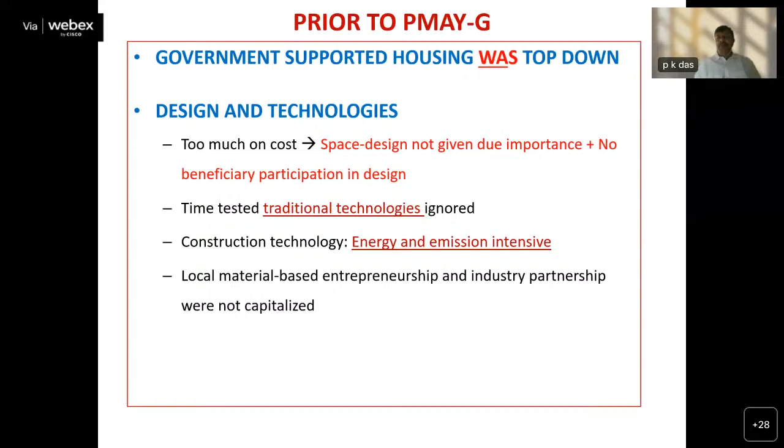Now, under these circumstances, the MORD expectation was to address the above issues and set a trend in rural housing in general through PMAYG. So PMAYG is not like one more housing program of delivering 30 million houses. Through this, PMAYG wanted to set a trend in rural housing and influence rural housing in general.

Now, what is the process that was adopted to have this paradigm shift? 13 states were chosen on priority basis by the Ministry of Rural Development. And what we did was, instead of starting the design at the studio level, we went to the beneficiaries. We went to the beneficiaries and we wanted to understand what their aspirations are.

So we didn't define what a housing is as per the Bureau of Indian Standard. We requested them, how do you think a complete house should be for you? So the beneficiaries defined it. And then we saw what was possible within the fund for PMAYG, and the gap was supposed to be mended. How do we mend the gap?

The study was based on resource mapping, and it was focused on consultation and participation. We took 9 basic criteria for the in-depth study of the housing sector. We began at the state level, then district, then block, settlement, and households level.

The entire journey was by car, slightly expensive, but wherever we stopped for a cup of tea, we'll stop there, go to the village, and have a look at what kind of materials are being used, talk to a few masons, about materials, etc. So this is how we enlarged our understanding about how the people in the rural areas live.

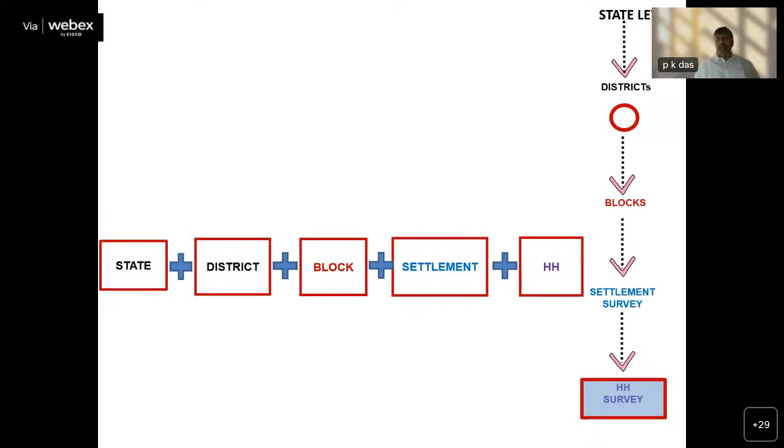Now, in this process, we got how the state, district, block, settlement, and particularly the housing households view housing as one of the solutions. These were all merged together and synthesized into a report. And the report was shared with the state government.

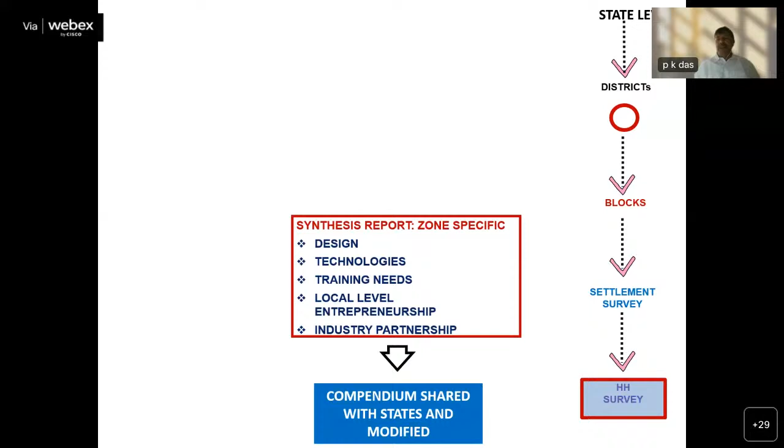And after getting their comments, it was finalized and it was fed into PAHAL, the book which Mr. Negi has informed right in the beginning. And Dr. Prashant Kumar, who is the other speaker, was the main captain of that particular movement.

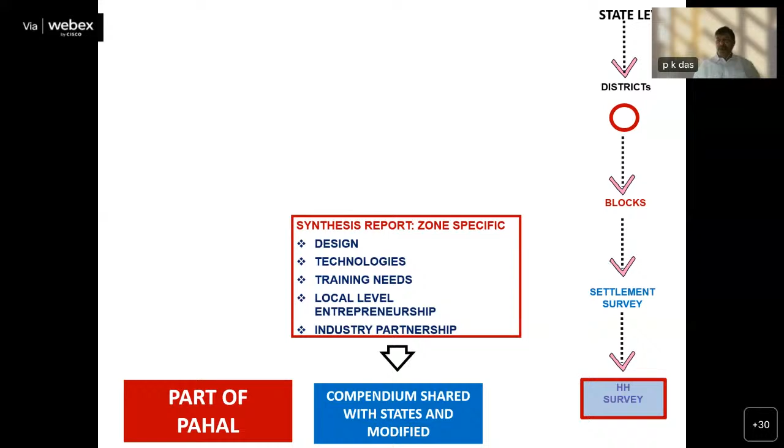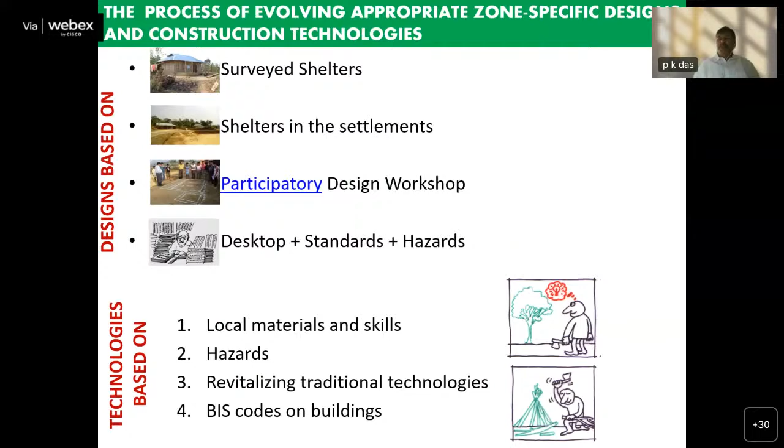Now, you can look at the process of the design and the technologies. You can look at the participatory process. And the technologies were primarily based on local material technologies.

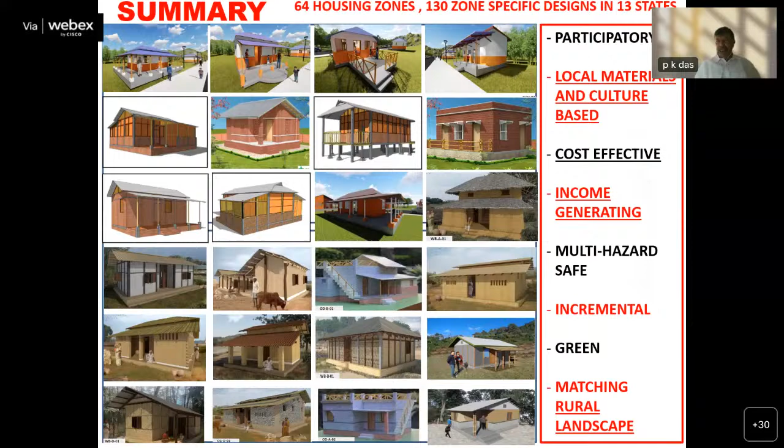When we conducted this in the 13 states of India, we got 64 housing zones of India and about 130 zone-specific designs. Now, that was a time when, it was the end of 2016, and it was told that the Honorable Prime Minister would be launching PMAYG in Agra.

But then we came to know from MORD that the Honorable Prime Minister cannot launch it if the technologies are not validated. Now, the 64 housing zones, 130 designs, and a good number of local material-based construction technologies were also evolved. Who could be the institute? So we were trying to expedite this with both MORD and the UNDP.

And one thing that came loud and clear was that CBRI is the pioneering institute where we can go for this. CBRI scrutinized 600 drawings and examined the architectural and structural side of that, and finally prepared the validation report of 40 technologies. And they look like this.

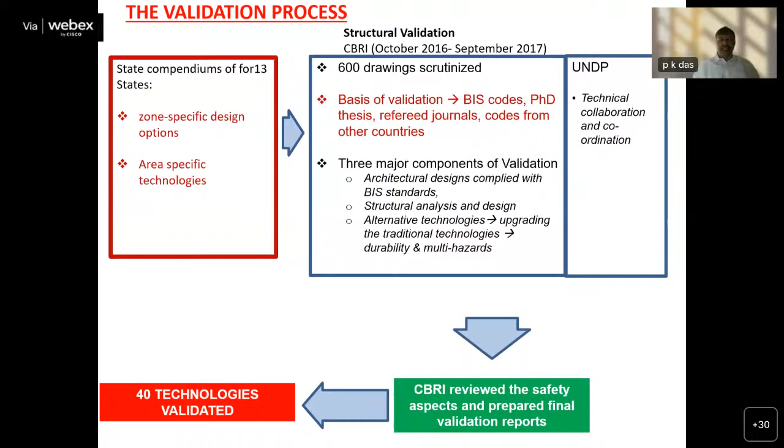So many foundations, so many walls, so many roofs, etc. I've been working in this field for quite some time, and this is for the first time I'm finding that bamboo and a few improvised vernacular systems have been recognized.

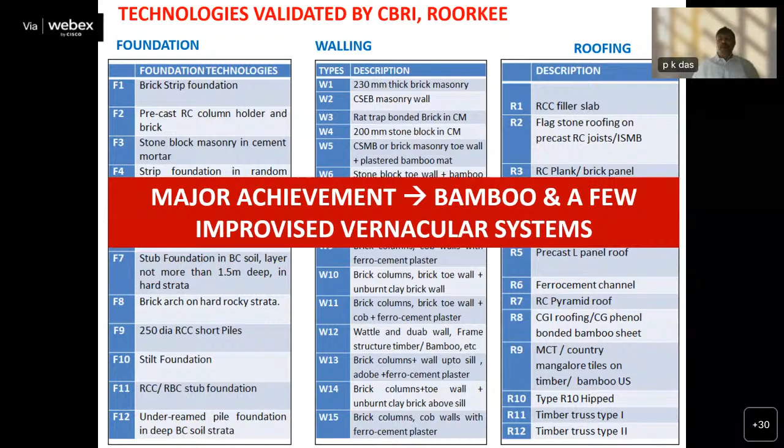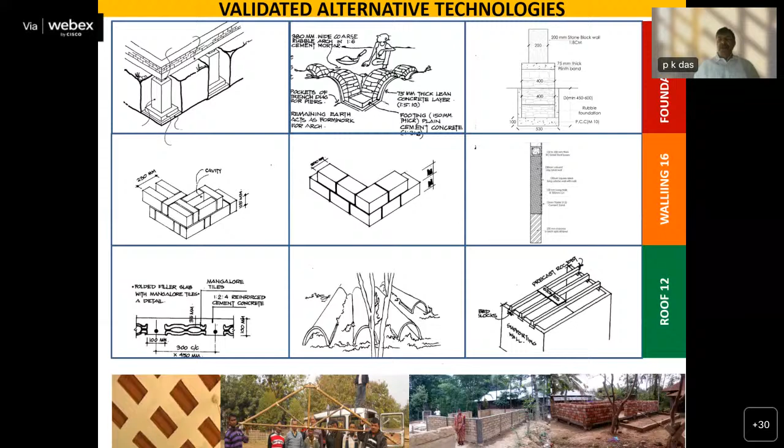Otherwise, neither was I taught this in my colleges, in undergrad, postgraduate, or PhD. And this is for the first time we get bamboo and a few improvised vernacular technologies validated by the CBRI scientists. This is how it looks, the validated technologies of different foundations, walls, and roofing systems.

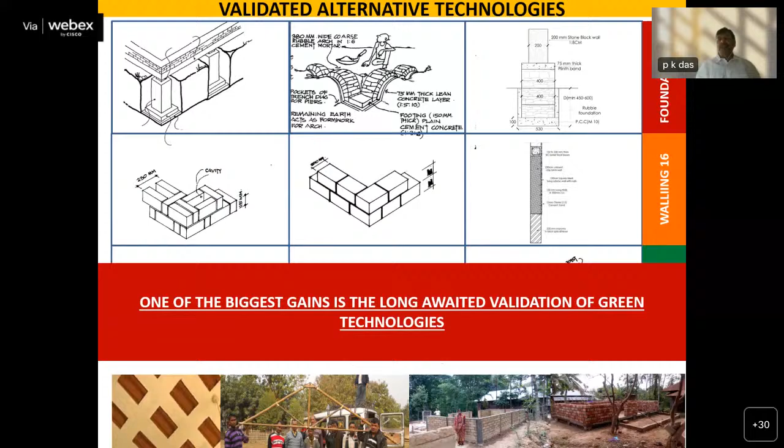One of the biggest gains in this is the long-awaited validation of green technology. We all talk about it, but how will a junior engineer or assistant engineer in the rural area ever listen to us and adapt green technologies if there is no assurance of structural validation? So now the gate has opened.

PMAYG vision also had another very important aspect, viewing construction as an opportunity for local level employment generation. By and large, whenever we construct with bricks, most of the money goes to the rich people's pocket. I'm not against it, but if I construct 100,000 houses in a particular state, we don't want the majority of that money to go to the brickfield owners. So it was envisaged that if we use labor-based, labor-intensive technologies and local materials, quite a large amount of investment will be enjoyed by the local people.

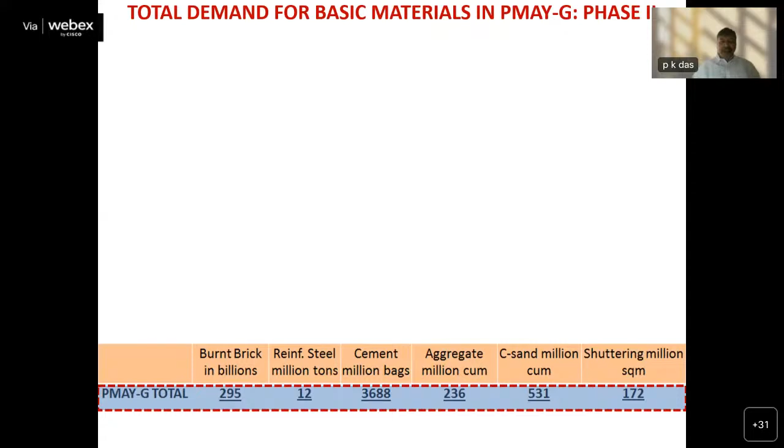If you look at this chart, the burnt brick requirement of the PMAYG for about 30 million houses was 295 billion bricks. Quite a huge thing. This is the panoramic view of burnt brick, reinforcement, cement, etc.

One of the most important things of the ongoing project was that all these technologies are non-renewable resource, energy, and carbon dioxide intensive. So there was a strong need for alternatives, and the validated technologies had quite a good number of green technologies. If I assume that 20% of a PMAYG annual target is under the green design and technologies, then what do I find?

Bamboo and Ikra, which is quite relevant in many parts of northeastern India, can support entrepreneurship of small units run by SHGs. There is great potential for industry partnership because why should the rural construction industry always be low tech? Why don't we take advantage of the advanced technologies offered by the high-end skills of the industry? We can have corrugated iron sheet, corrugated bamboo mat, precast roof, prefab doors and windows. We can have industry partnership to enhance quality and reduce cost.

The third sector is medium level entrepreneurship, such as compressed stabilized mud block, micro concrete tiles, etc. If I look at this kind of technology, we'll be able to create quite a large number of green employments. If I look only at CSEB, we calculated that if I adopt 20% of the annual target of PMAYG, then 78,000 families could be supported for one year. Quite a good thing, apart from the benefit of reduction in energy and carbon dioxide emission.

This is the overall summary of the kind of opportunities that can be generated through Pradhan Mantri Awas Yojana Gramin. Now let me come back to the basic premise of this presentation, what is the ground reality? The ground reality is like this.

For the first time in India, participatory people-centric design is based on the aspirations of those people, not us, not what we think their aspirations should be. It is the people's own aspiration, and through a participatory process, designs are being prepared.

Mason's training is a revolution because earlier the Indian construction sector, particularly in the rural area, was unorganized. In one of the presentations in Johannesburg, one guy told me that your Indian industry is unorganized, you do not certify masons. I'm talking about 2010, 2011 or something like that. I felt hurt, but I was trying to defend my own country. But it's true that we didn't have it.

Now, under PMAYG, a large number of masons are being trained through a 45-day training program, and there is RPL, recognition of prior learning. But these are all on conventional technology. People are in the driving seat, as Dr. Prashant Kumar has shown in his presentation. It's a transparent system, Awaas software is in the public domain, so anybody can look into the status, the progress, etc.

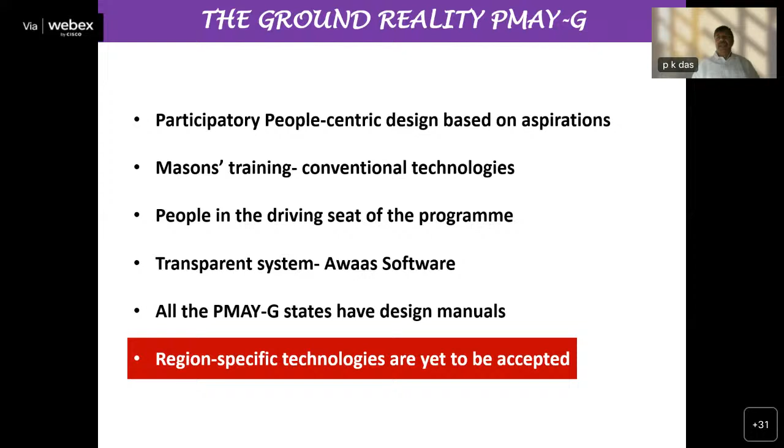All the PMAYG states have design manuals, and these design manuals are all prepared by the people. Now, one thing I have to admit is that while the design has been widely accepted by many states, the region-specific technologies validated by CBRI are yet to be accepted. There are so many factors in that. Let us look at that.

On one side we have the government of India, state government, DM, and on the other side the people, the Gram Sabha, GP leaders, etc. They all converge at a point, the BDO, Block Development Office. This is the most important link between the public and the government, and the last government link with the people, where the policies get translated into reality.

If I simply say please, these are CBRI validated technology, use it - nobody is going to use it. What we have to understand is the top level management, the community's perception, the DM and the BDO, the engineers - these are some of the most key factors. Until and unless we have a very clear concept of the dynamics at the rural level, it is difficult to promote green technologies.

After sitting in the BDO's office and DM's office for hours, certain things have become clear. Top level management is very important - most DMs do not have time, they're so busy with so many factors. So until and unless we go and talk to them with a very clear vision, that's important. Who informs them? Many times the DM is being informed by a very incompetent person, maybe sometimes with some interest. So it's very important that when we go to the DM, we are very clear, very brief, and to the point. The other thing a DM would always look for is, do we have the data for the schedule of rates? Otherwise it's a question of responsibility.

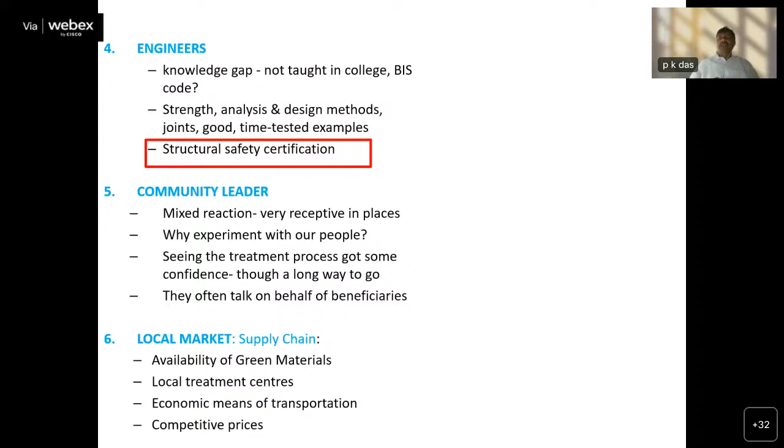Then engineers, community leaders, local markets. The engineers have the age-old issue of structural safety certificates. If the building falls down, what will happen? If an engineer is in his late 50s, he'll think about the pension - anything happens to my building and my pension is stuck. So we have to say something, we have to demonstrate. I'll talk about it a little later.

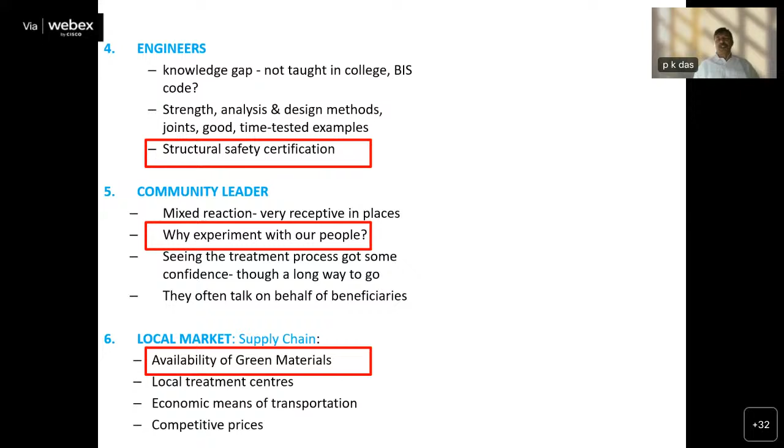Local market - even if I tell my beneficiaries, look, please use green technologies, there are lots of advantages, where are they? They're not available in the local market. The community leader quite often asks me, why do you want to experiment with our people? Yeah, all of them are valid points.

Then we have got the problems with data, skill, and environment. As far as skill is concerned, while PMAYG has a significant contribution of mason training in conventional technology, green technologies are yet to take up. But the revised framework of implementation is a very good toolkit to implement that as well.

Now, with all these backgrounds, let me come back to the most crucial point of Pradhan Mantri Awas Yojana Gramin - dissemination of technologies by MORD CBRI. MORD CBRI partnership has decided that we begin with Assam and Uttar Pradesh, and will demonstrate buildings by constructing 6 demonstration buildings. If we simply build a few demonstration buildings and come out, it is not going to create a dent at all. Until and unless we stay there for a longer time and support people at grassroots level. So from CBRI it was decided that 80 beneficiaries in the 2 states will be given doorstep support for a prolonged period. The spin-off of this will be an enabling environment at the local level.

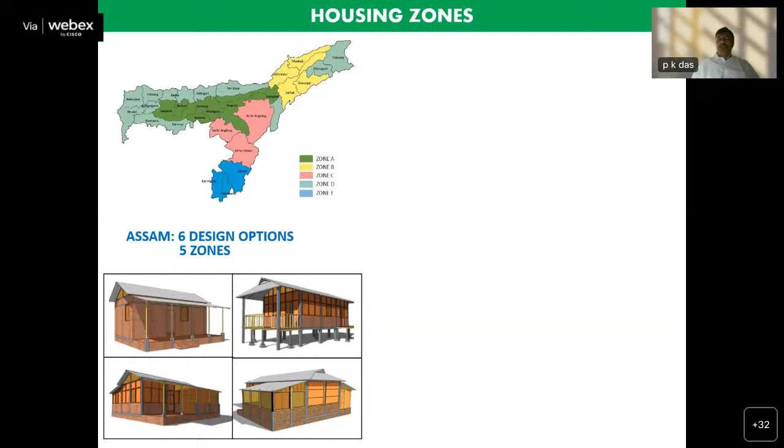Now, Assam has got 5 housing zones and 6 design options. Uttar Pradesh has got 6 housing zones and 6 design options. What is the structure of implementation in Assam and UP? Each state has selected 2 districts which are adjacent to each other. Why adjacent to each other? Because we will be making the demonstration building on one side, and if they are more or less at the load center, then both the state districts will be getting the opportunity to look at the demo building.

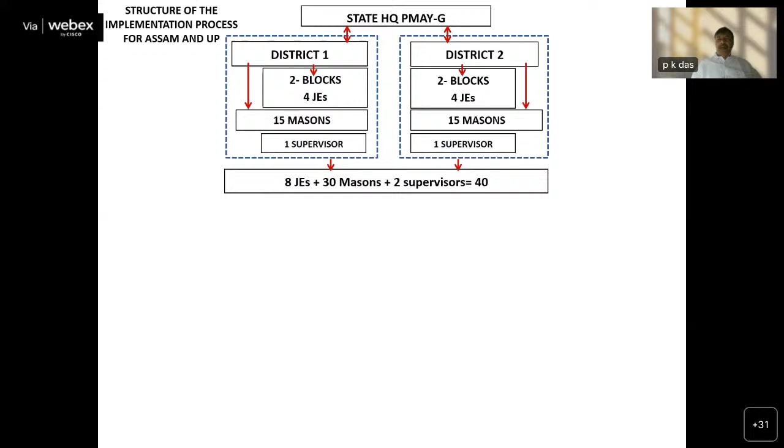Each district has 2 blocks, so 4 blocks. And the last target box is: 8 JEs, 30 masons, 2 supervisors, altogether 40. They will be our ambassadors.

Now, the first thing is whenever we have a project like this, if we do not orient the top level management at the district level, it is a futile exercise - it will be something like a lateral entry. So what has happened is Assam has already sent their top level people from Dibrugarh and Tinsukia to CBRI on the 27th and 28th of last month. They have undergone the orientation training. So we have got a favorable ground now.

The next step will be hands-on training for constructing the demo buildings, showing various types of foundation, walling, roofing, and finishing. The output of that will be 3 demo buildings and a good number of human resources. With these human resources, techno-managerial support will be given to the doorsteps of the people so that they can construct 40 plus 40, 80 houses.

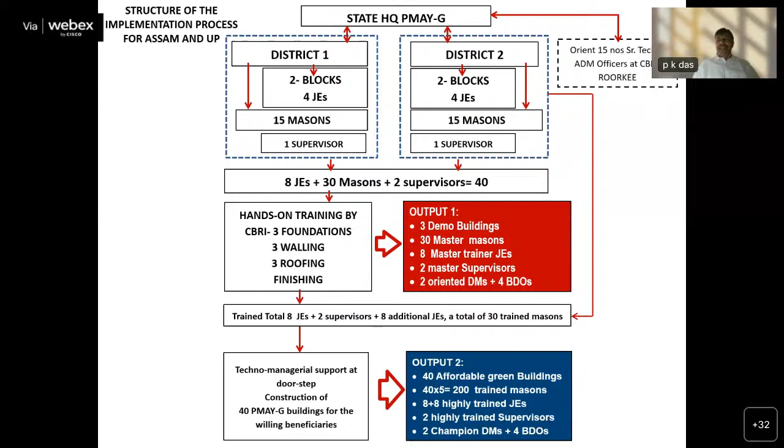We are envisaging that in this process, we'll be able to create a dent in the field of disseminating cost-effective technologies and green technologies. This is the output of the 2 states: 4 districts, 8 blocks, 86 buildings, 60 master trainers, and so on.

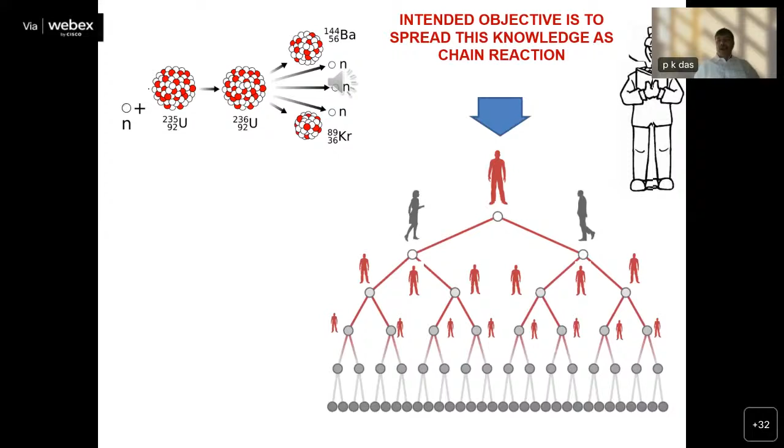What was the purpose of doing this? Do we think that by making a few demo buildings in 2 states, we are going to change the whole world? Certainly not. But CBRI's intention is to spread the knowledge as a chain reaction, like in a nuclear reaction. So initially we tried with 2 states, Assam and UP, and over time we'll multiply to several other states.

Before I conclude, I have about 2.5 minutes left, so let me tell you the story of Tripura. Way back in 2014, when the study I mentioned was over, the then Additional Secretary, Mr. Vijay Raghavan, and the Joint Secretary, Ms. Vijaya Srivastav, said, enough of research, show us something on the ground.

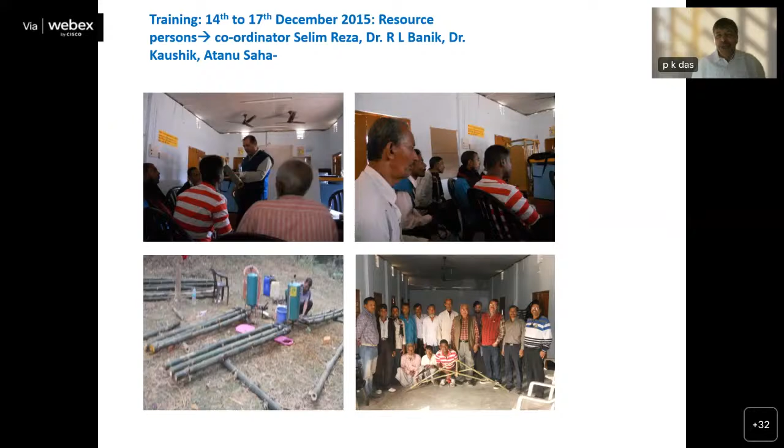So we took up the first step in Tripura. Watch out for the date, 5th September 2014. But by the time the state government was convinced, a year had almost passed. So the bamboo workers were trained.

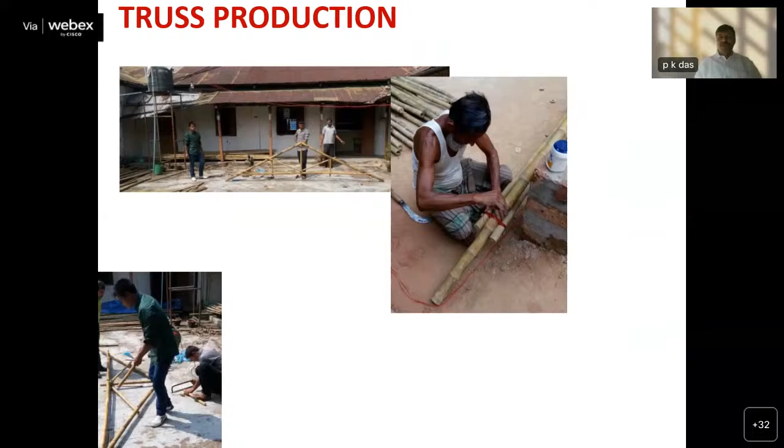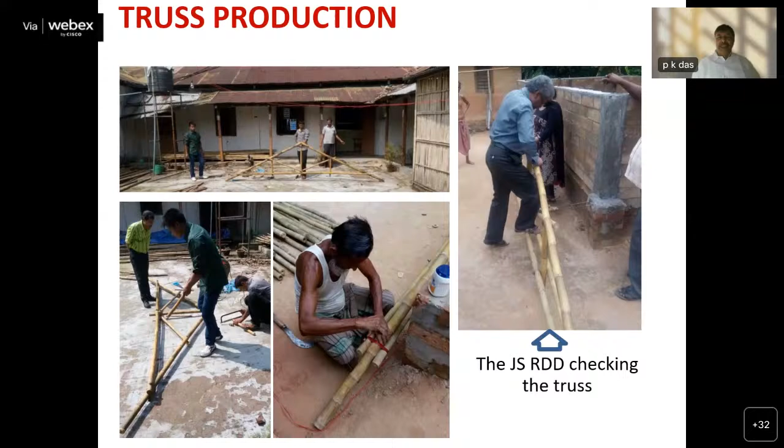Construction started, and you can see the different stages. The lower part is compressed stabilized mud block, and this is in zone 5 seismicity, so only a toe wall was made, along with seismic reinforcement, which you can see. Then came the superstructure using treated bamboo, and this is how the building was almost complete. The bamboo mat in the superstructure was plastered from outside, and it looks like this.

Now, 7 years later, the house looks like this. What happened was, when these houses were being constructed, there was a very young IAS officer who was tagged with me by the DM as a probationary officer.

Okay. No issue, sir. Yes, sir.

This gentleman was so enthusiastic that I received a call from him in February this year. He said, look, now I am the DM of one of the districts of Tripura. Let me mention it's West Tripura. Come, I would like to continue with that.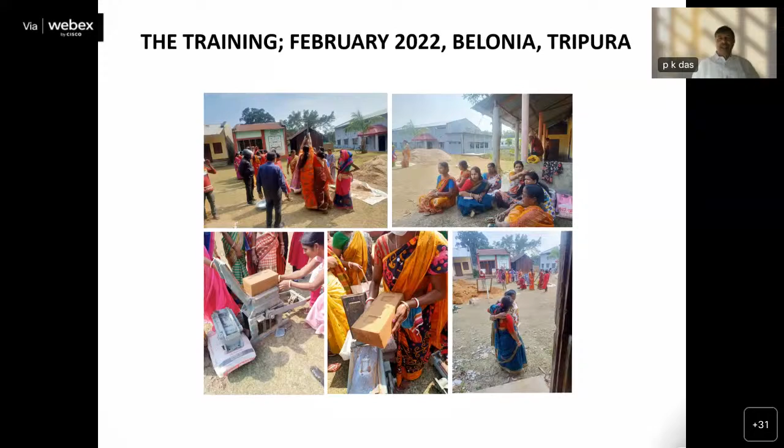So in February, it was Belonia, Tripura. The DM said, look, I have a self-help group of women, but they aren't getting market by selling papad, achar, and things like that. I would like to involve them in block production. So the block-making training started, and the women continued with block production.

One women's SHG continued block production even after the 4-day training program, and the blocks produced had to be implemented. So Archana, one of the poorest beneficiaries of that area, who earns only 1,500 rupees a month as a cook in the school for the midday meal, was chosen for constructing the house, and her house was built.

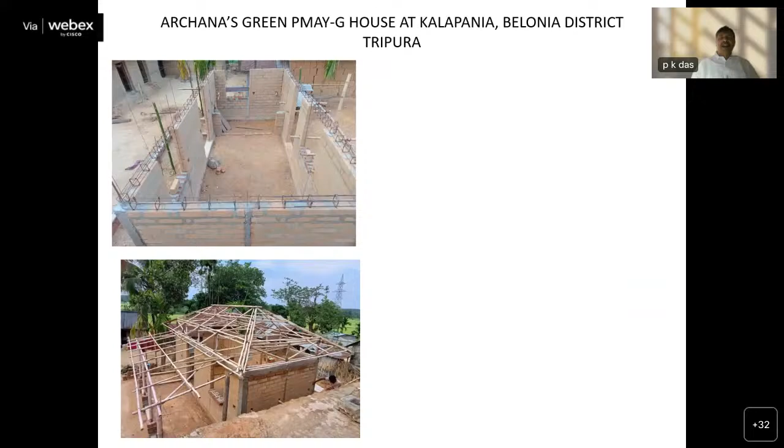360 square feet covered area, 2 rooms, veranda plus kitchen, 1.53 lakh rupees, completed in 50 days. Now the SHG produced 2,000 blocks and earned 20,000 rupees. This is how the SHG looks like.

On the left-hand side, you can see it's like a mini lab. They have an electronic weighing machine, they weigh and produce the blocks, and the blocks are tested. You can see the young kid, because here the women can look after their children while producing blocks, since the block production happens right in their outskirts.

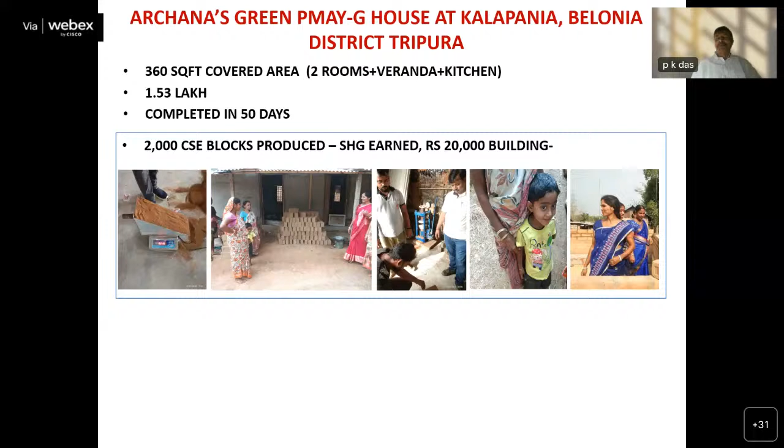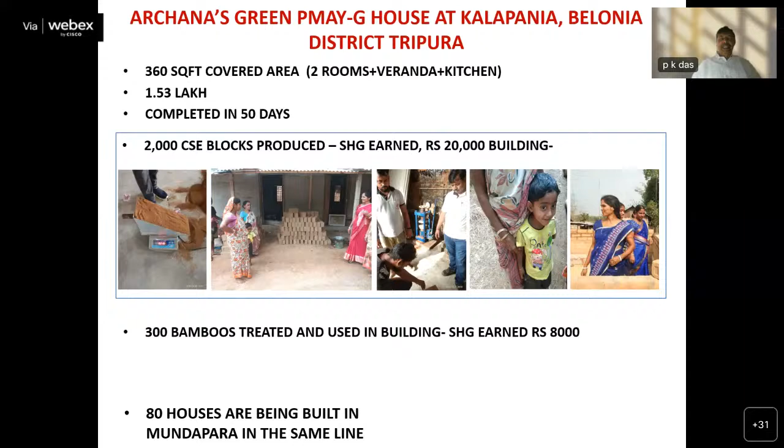300 bamboos were treated for this particular building, and the SHG earned 8,000 rupees. Now, following the same line, 80 houses are being built in Mundapara.

In summary, we can say, as I've already mentioned, green, participatory, people-centric design, etc. But this block is about disseminating region-specific technologies by CBRI.

Tripura has already demonstrated one of the ways of dissemination. The CBRI program in Assam and UP would make the top-level management aware, give community an opportunity to experience in reality what green technologies mean, lay the foundation stone for local entrepreneurship and industry partnership, engineer confidence on green building, the act of building, train masons and aware people on green technologies and designs.

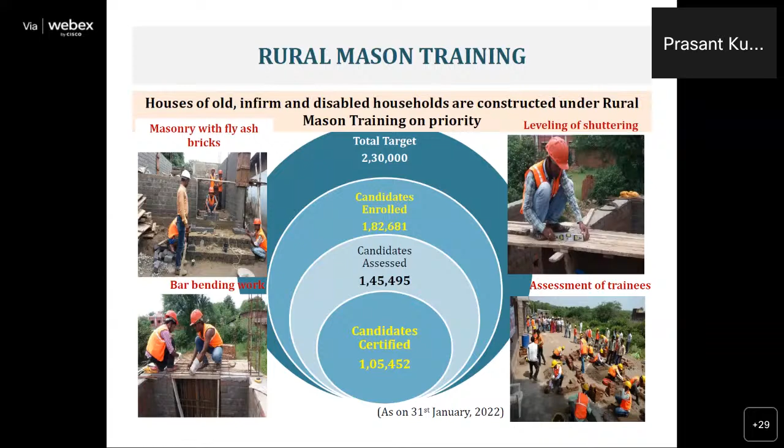Convergence is a very important aspect because it leads from a house to a home, because if a house has all the facilities of toilet, clean cooking fuel, electricity, drinking water, and tapped pipe water.

In one district of Rajasthan, the collector took an initiative and issued an order for convergence of 15 programs with PMAYG, including construction of tanks because it is a dry area. So PMAYG's convergence aspect has played a very good role in upping the quality of life for the rural population.

Dr. Das has already spoken a lot about house design typologies. Here I would like to show only one. On the top left is the house design typology developed by UNDP and IIT Delhi and vetted by CBRI, and on the right side is how the house has actually been constructed. It incorporates features of low cost technology, disaster resilience, and local geoclimatic considerations have been taken into account.

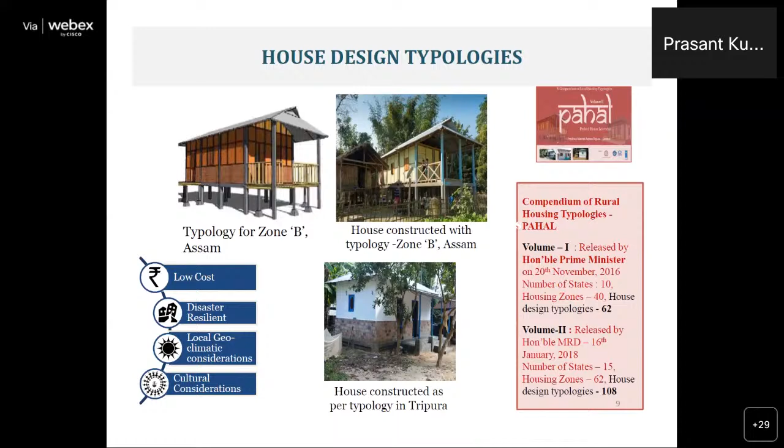Since we have taken a lot of effort in making it a good program, good scheme, the average time taken for completion of a house, which was approximately 314 days in 2015-16, it came down to...

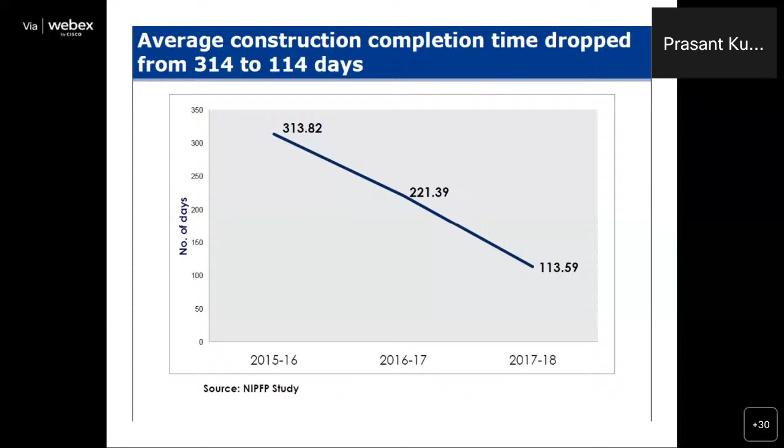113 days in 2017-18. So you can see the impact of various steps, various new aspects that we had introduced.

As I had said earlier, this almost doubled the number of houses completed in seven years' time, that is 2007 to 2014 and 2015 to 2023. So it is more than double.

As all of us know, house construction leads to a lot of employment generation, both direct and indirect. And if you talk about the construction material industry, it gives them a very good opportunity to pitch in.

These are the numbers from a conventional pakka house, which incorporates bricks, cement, steel, etc. We can see here that the number of bricks utilized for a typical PMAYG house is somewhere around 10,000, 125 bags of cement, and 0.4 tons of steel.

And even if 80% of these houses are from the conventional technology, you can imagine the number of bricks, cement, and steel that will be required for completion of these houses.

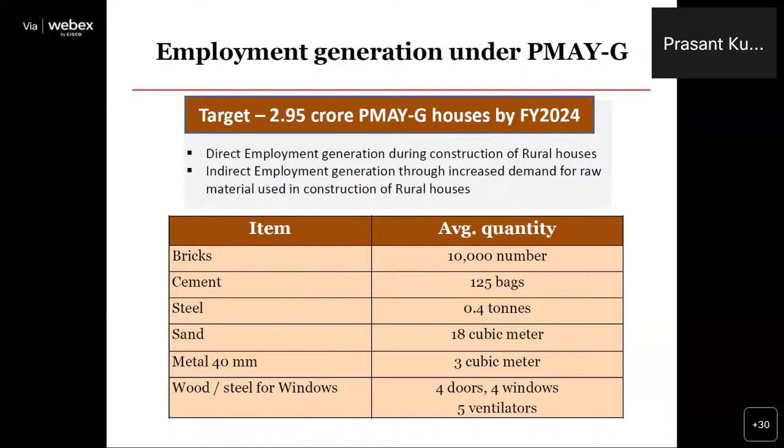While we implemented the program of PMAYG, we faced a few constraints and impediments, and the biggest one was that there were landless beneficiaries of PMAYG, and their number was approximately 4.09 lakh.

With a lot of effort from the ministry and the state government, only approximately 50% of these landless beneficiaries have been provided land.

This led to formulation of schemes of assistance to purchase land by the beneficiaries, and this includes the states of Assam, Bihar, and Maharashtra, which have come out with schemes to provide assistance to the beneficiaries to purchase land.

Another important constraint was how to capture the quality of the house. This was a very big challenge, because we could count the numbers from evidence-based monitoring, but how about the quality?

So we came out with online modules, and initially we used to pick up houses manually and send them to the different states so that they could come back with their feedback.

We went to the states with our observations that, according to the photograph, this house appears to be incomplete or deficient in quality, and the states were supposed to give their feedback on those.

But of late, what we decided is that we will use artificial intelligence. We trained our computer, and now it is an online module to address this issue.

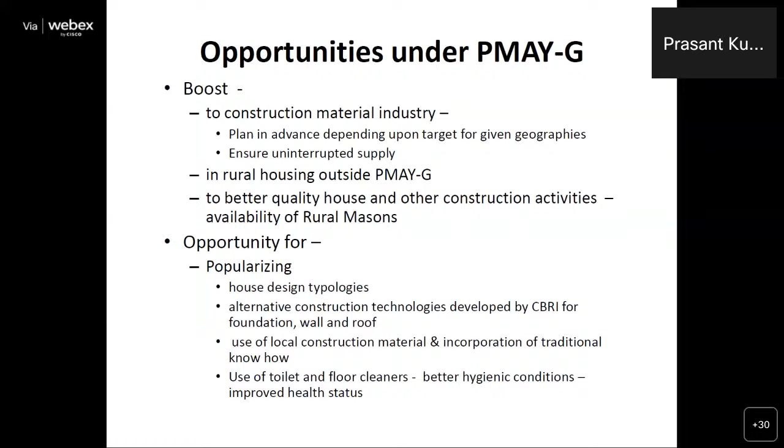Another very important opportunity thrown up by PMAY-G is the increased use of toilet and floor cleaners. This is an opportunity that needs to be looked into, and it can lead to MSMEs producing more quantities of these cleaners.

This brings us to the last slide of my presentation. There is an opportunity for prefabricated houses.

But in my opinion, from my last interaction with industry people, it was slightly on the higher side so far as cost is concerned, and they'll have to think about lowering costs and preparing the clientele, because cost can be lowered with economies of scale, but reaching that level of economies of scale is very difficult and needs a lot of effort in that direction.

The ministry had also issued guidelines for collaboration between the technical institutions of a state, district, etc. These technical institutions were supposed to provide technical guidance, field facilitation, supervision, and quality control to the states, blocks, and districts. So technical institutions who wish to onboard this program can have an MOU with the state governments or lower formations, and the ministry has already issued guidelines in this regard.

And the loan product we have already discussed. The study by NIPFP found that 63.40% of PMAY-G beneficiaries invested more than what they had been given as subsidy, with additional investment ranging from 1,000 to 5.5 lakhs.

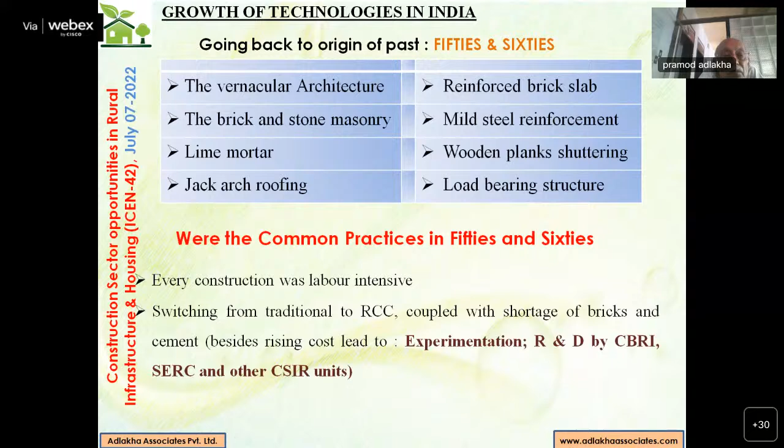In the 50s and 60s, partial small prefab technologies were developed with conventional materials which were easy to cast, easy to erect, easy to understand even by small contractors, based on manual methods for local employment generation. Then the next improvements were done in the 80s and 90s when BMTPC came into the picture.

When lab to ground transfer of technology happened, BMTPC was created. Even CBRI took this initiative. But from 2000 onwards, when these technologies were slightly mechanized—I call this semi-mechanized—there were effects of climate change, carbon footprint, energy conservation, the environment, and national resources. These became the primary factors.

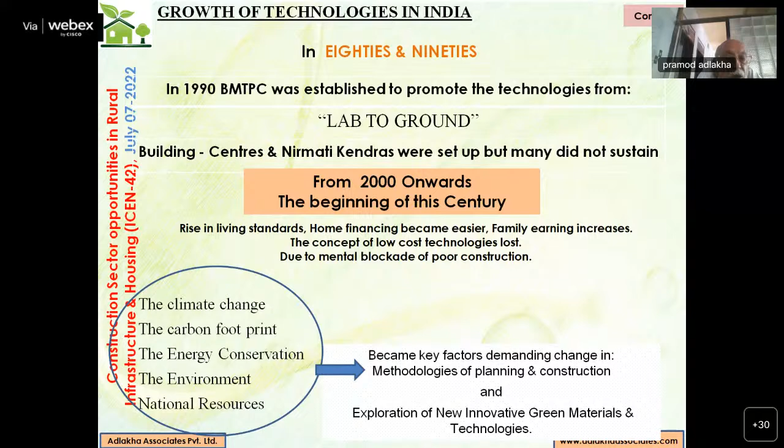And when these become the primary factors, the methodologies of planning and construction also change. There were explorations of new green materials and new technology. But what CBRI has done belongs to this category. The only thing required was to make it mechanized, semi-mechanized, and improve the quality of construction.

Then came the Sunshine scheme, JNNURM, RAY, PMAY both urban and rural, and Affordable Housing for All. These gave us the boost for both urban and rural areas. Tier 1 and Tier 2 cities were promoted with fast-track industrialized technologies. But what CBRI has done, I'm still promoting—I suggest this is suitable for rural areas, semi-urban areas, semi-rural areas, even small towns, up to tier 3 or tier 4 level.

For the promotion and implementation, there is a bright side of success of these technologies, and the success story will show how to overcome the resistance. The question is, resistance has come. In my 50 years of implementation, I faced a lot of resistance, but my mantra has been continuous persistence—discard the fears and negatives at the beginning, but move ahead with renewed vigor. Going through five decades of fighting against all odds, what I have learned is one may encounter many defeats, but one must not be defeated.

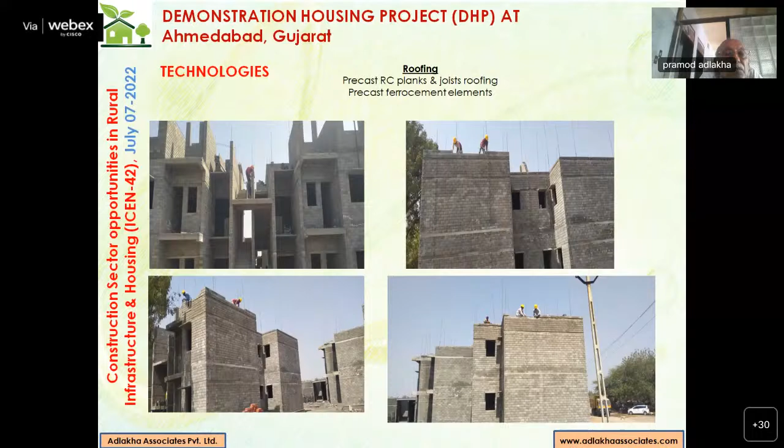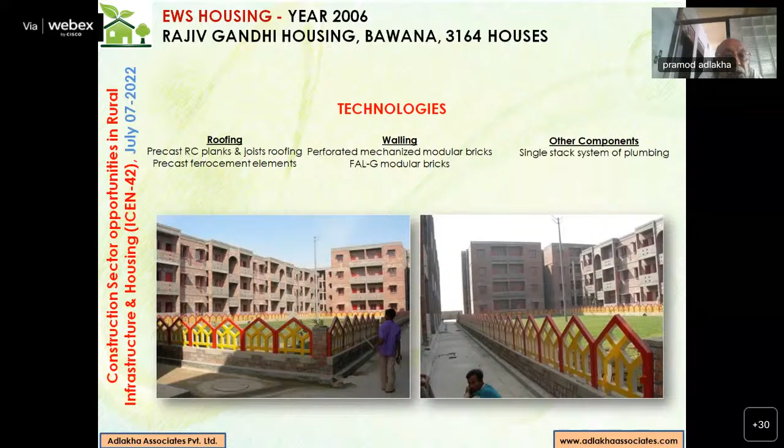Next, this project has 3,164 houses completed in 2006, and it has won 6 awards—the only award given by the Ministry of Housing for Technologies. It used the RC plank system, REB bricks (resource efficient bricks), and many other precast elements including precast ferro cement water tanks cast at the roof itself, a single stack plumbing system, and even a UPVC soil and waste system introduced in this project.

In 2008 we completed 1,184 houses, again using the RC plank system, perforated bricks, and precast elements.

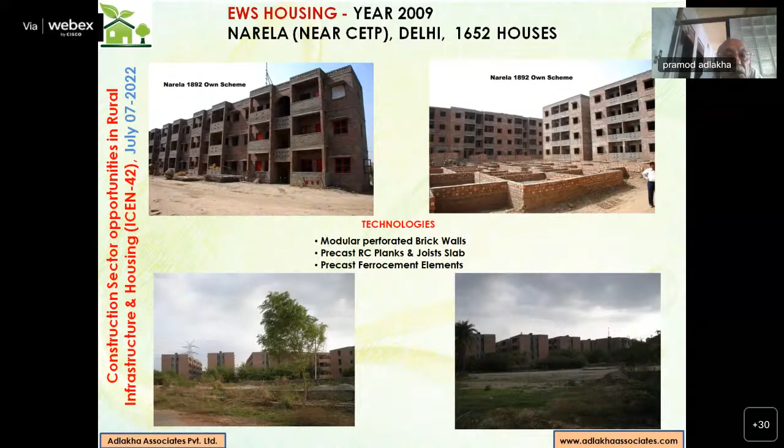This is housing we did in Narela—1,652 houses, the same technology as Bawana shown earlier. This is the mass housing scheme I did for 10 years, constructing more than 30,000 houses with this technology in Delhi itself. This is in Baprola, 5,568 houses. And 896 houses in Bawana, Delhi.

240 houses, 5-storied, in Bakarwala, Delhi. This is the first time we used the RC plank system in a frame structure—not done in India so far. This opens the possibility of using the RC plank system in a multi-storied frame system also, which has not been tried by others, but I have tried it in building about 14,000 houses with this technology.

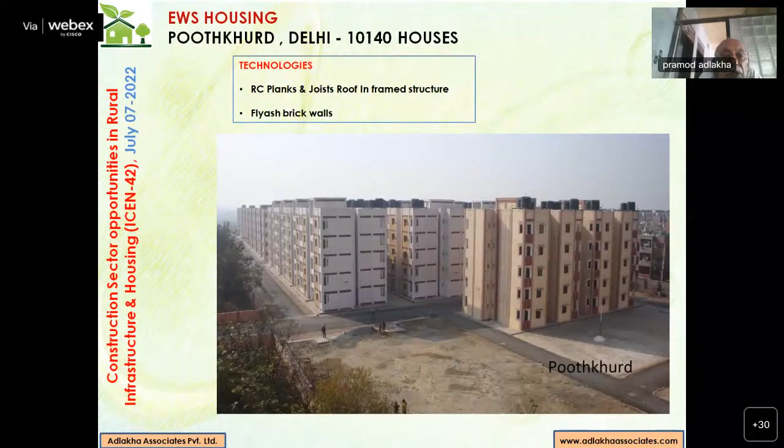This is 10,140 houses constructed in Poothkhurd, Delhi, using the RC plank system, fly ash brick walls, and many other precast elements.

3,024 EWS houses in Kalkaji, Delhi. These are yet to be occupied—allotment happening in just 7 days. This is with CLC blocks; mainly it's a frame structure, but we have used CLC blocks for the walling in this.

This is Era Group's Faridabad and Palwal EWS housing. We have used 578 houses with RC plank systems, other precast elements, and resource efficient bricks.

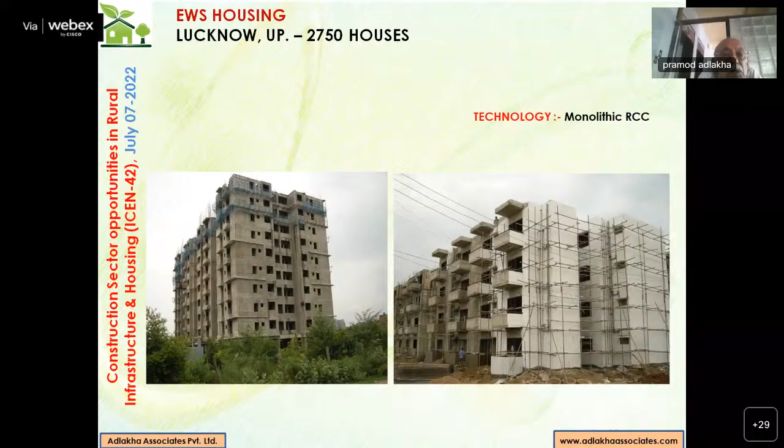This is Lucknow, 2,750 houses, using monolithic technology. And 3,680 houses at Goga, also using monolithic technology.

4,560 houses in Tikri Kala, that is also Delhi. Partly it is remaining, but now in the process of completion. RC plank systems again, and fly ash bricks and precast sunshades and other precast elements like kitchen platforms.

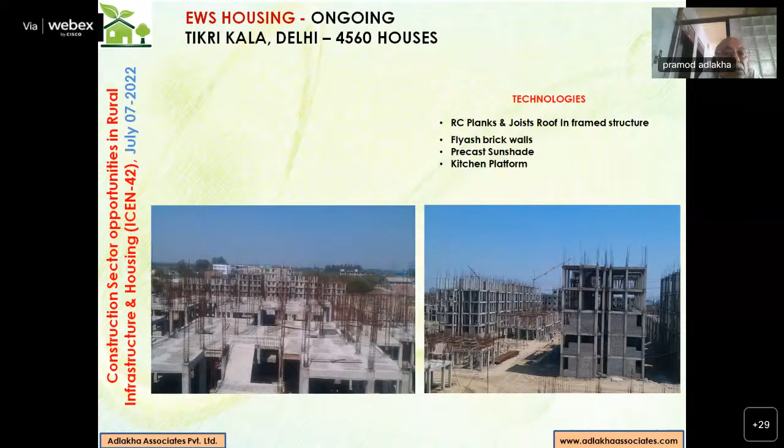754 houses, again monolithic technology in Delhi.

This is Omicron Greater Noida, 1,848 houses we completed. It has been occupied for the last almost 10 years now. RC plank system and many other precast elements.

800 houses in Greater Noida. This is LIG housing, used rat trap bond, and for the roofings, partly it has been done with filler slab and partly with the precast system.

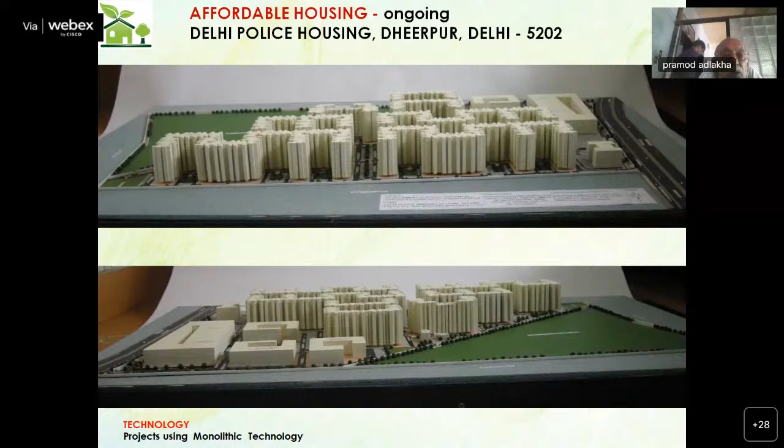This is the Delhi Police housing in Delhi, Dheerpur. It is an ongoing project, 5,202 houses with monolithic technology.

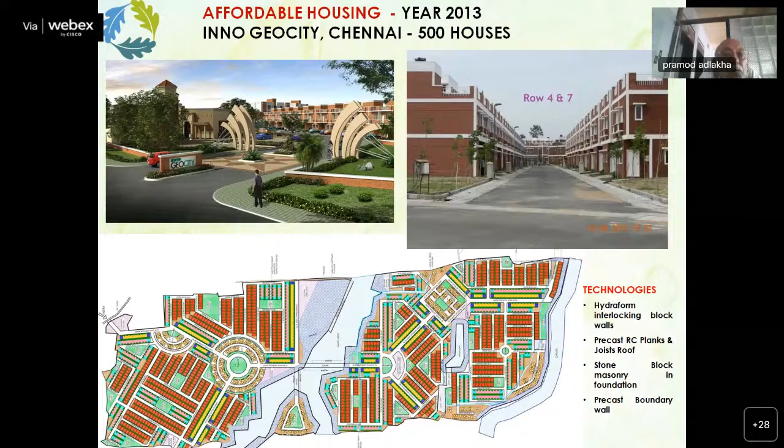This is 3-storied housing in Anjar and 4-storied houses in Vapi, Gujarat. Total houses are 669. Anjar comes under Bhuj, Zone 5. And we have used this RC plank system in Zone 5 with interlocking block technology for walls, mortarless block walls. These have all been occupied long ago.

This belongs to workers housing for Welspun Group, that is Goenka's group. This is affordable staff housing of various other companies. This was in Daurala, in a rural area, for Daurala Organics Limited and Daurala Sugar Limited. 7.5 inches walls, technology of CBRI, 190 millimeter thick wall, and precast ferro cement panel slab with precast joists.

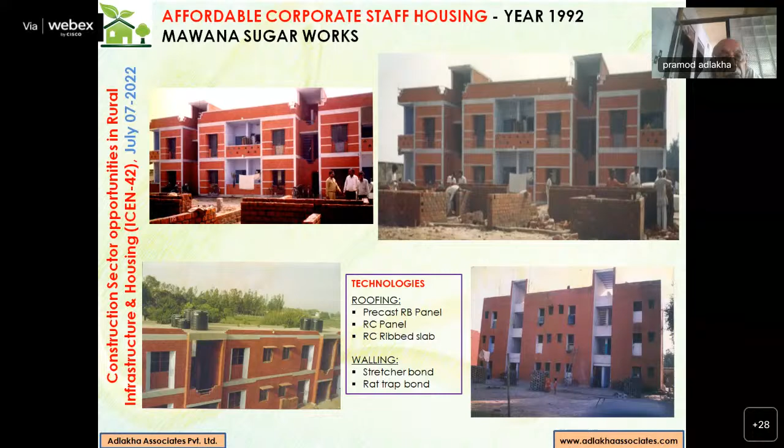This is again in Mawana Sugar Works. We did a lot of housing schemes for them, using many different technologies. They gave us a free hand in 1992. 2-storied building, 3-storied building, rat trap bond, 7.5 inches wall, precast concrete panels, RC plank system, that is thin RC slab system. So many technologies that I used there, even precast RB panel, precast RB curved panels. All these technologies were used in this.

This is in 1983, 144 houses we constructed for Vam Organic Limited, Gajraula. Load bearing construction, filler slab we call it, so basically an RBC roofing system.

Again, RBC roofing, load bearing construction, housing for Modi Xerox, Rampur. It is again a village area. Now it has become a town.

This is a demonstration house in KK Nagar, Chennai, 1976. This is my own invention, I had filed a patent for this. Precast panels with hollow panels, hollowness created by earthen coolers in this. So it gives employment to the rural generation also. And I have mechanized the production of these coolers also by introducing machinery and the production.

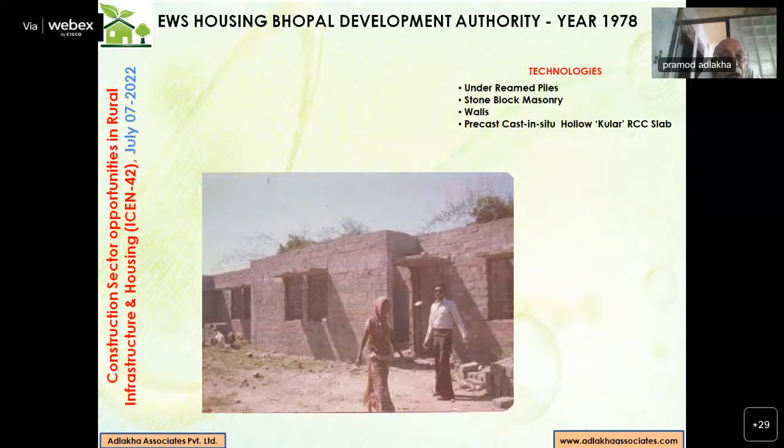This is an EWS housing scheme for Bhopal, 1978. Stone block masonry, roofing system with precast cast in situ as well as precast system with hollow kulars. These slabs and walls were tested by CBRI in their own unit, regional office, and MACT, and they approved these technologies by testing the panels which we had sent to them. Underreamed piles were used in this for foundations because of the black cotton soil.

This is a housing colony for DCM Toyota. Now the name is changed. This company, DCM Toyota, in Greater Noida. 7.5 inches walls, filler slab system, stretcher bond walling.

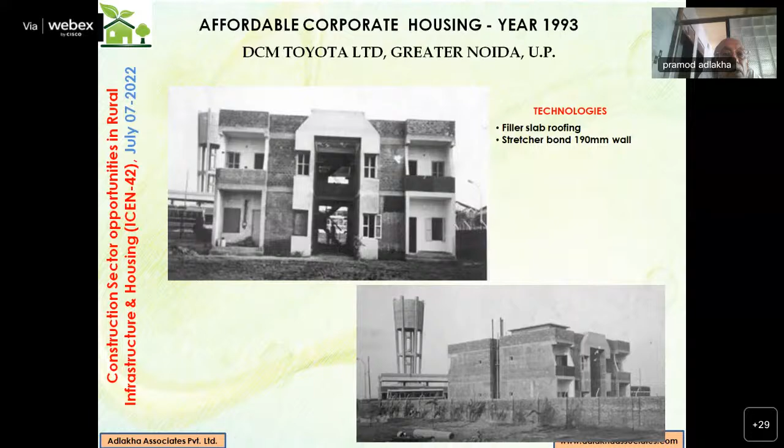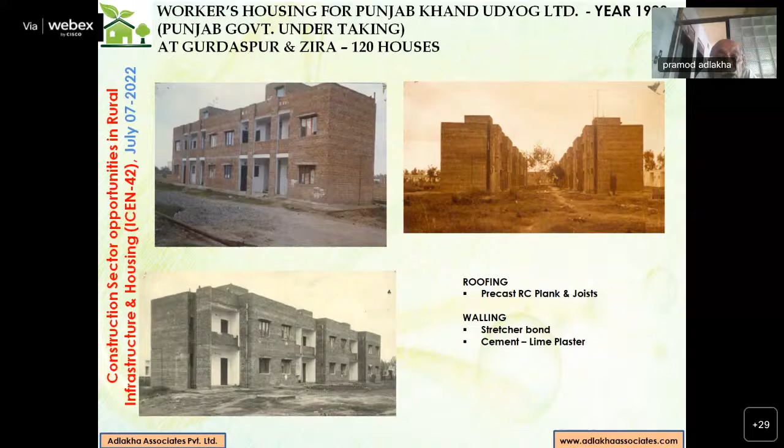This is housing we did during the bad period times in 1982, 83 in Gurdaspur and Zira districts. 120 houses we constructed. A lot of technologies were used through the NBO experimental scheme. 7.5 inches walls, RC plank system joist in this. We also used a composite mortar for plastering and composite mortar for masonry also, precast other elements also.

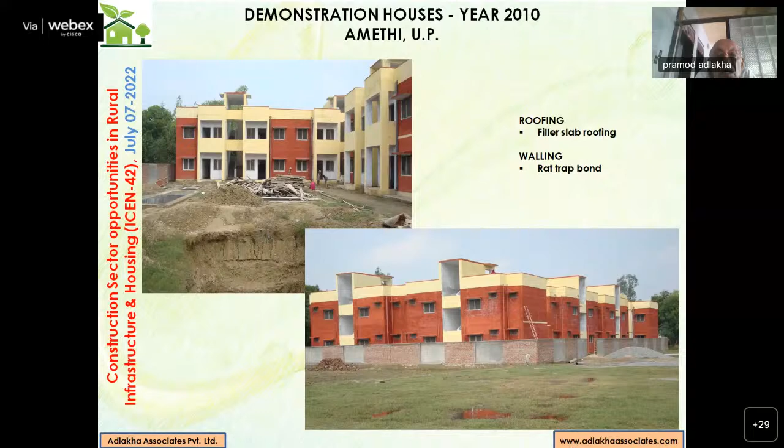Demonstration houses built in 2010 in Amethi, filler slab technology and rat trap bond.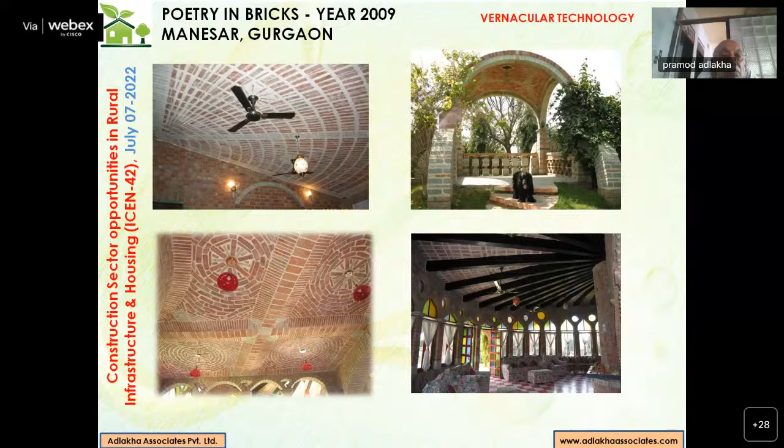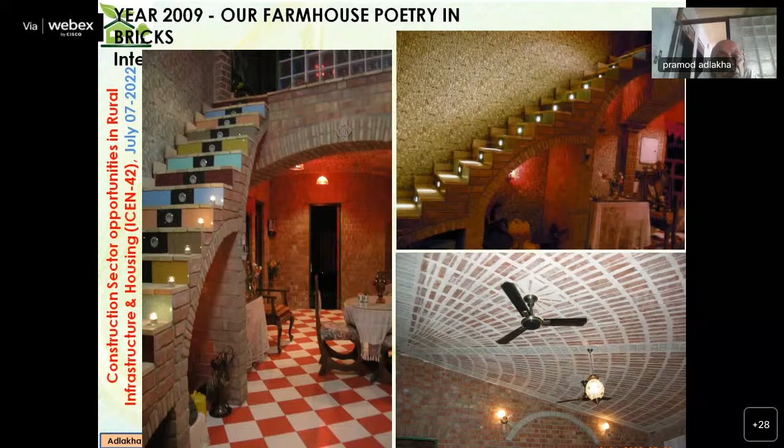This is a slide I tell all my viewers about. We have a notion that these alternative, innovative technologies are meant only for poor man's housing. This is a fundamental issue, which even Mr. Prashant has mentioned. The green and cost-effective technologies can be used for all types of affordable buildings.

I've used it for educational buildings, commercial buildings, hospitals, hotels, industrial buildings, and even high-end housing. So I just want to show you a few projects on this. These technologies are all from CBRI's portfolio.

This is the workshop building in Kurukshetra for United Rice Land Limited, a rice industry, where I've used precast channel roofing, and also another technology - arched foundations. This is again boys hostel in Modi Nagar, staff housing at Daurala Sugar, staff housing for Modi Cement Limited at Raipur. Filler slabs were used.

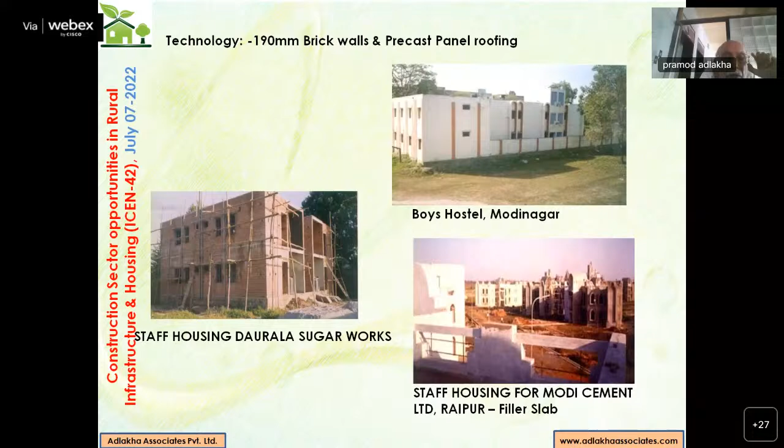These are all rural areas at that time, when I used to build these houses in the 70s and early 80s.

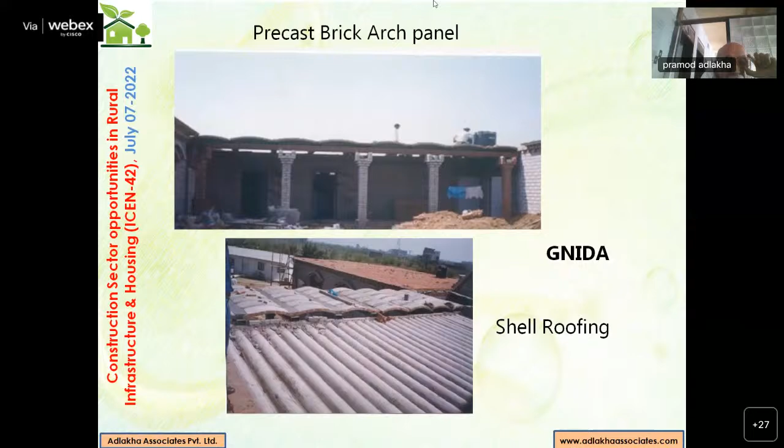Greater Noida Authority office building in Gamma sector. I've used 30 technologies in this particular building - they gave me a free hand. The first one is the brick arch panel, the second one is the shell roofing. Let me show you particular parts of the building - a funicular shell made of concrete, precast, as well as brick shell roofing, funicular shell.

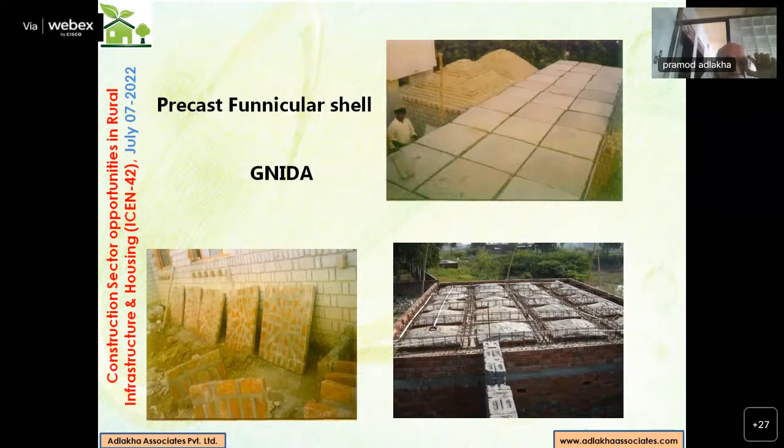This is a factory in Neb Sarai, Delhi, based on RC ribbed slab roofing and rat trap bond. The below one is an industry in Gurgaon with rat trap bond, ferro cement panel roofing, and other precast elements. This is a mushroom factory in the Sultanpur area of Gurgaon.

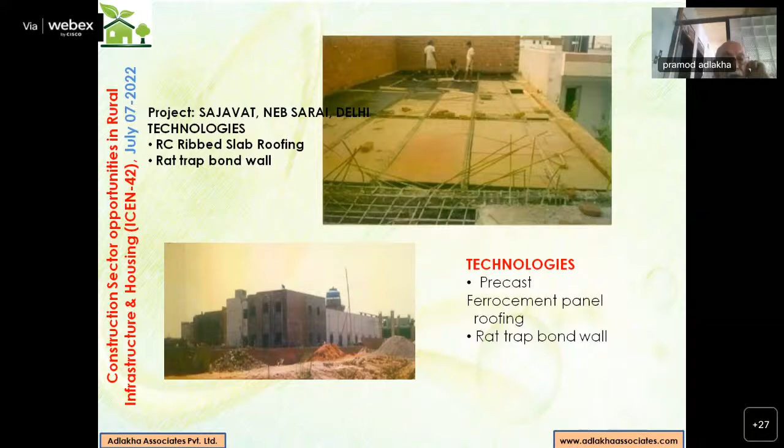This is the filler slab being done for a hospital project in Modi Nagar. The lower one is a filler slab, or RBC slab as you may call it, for a community center at Ambala.

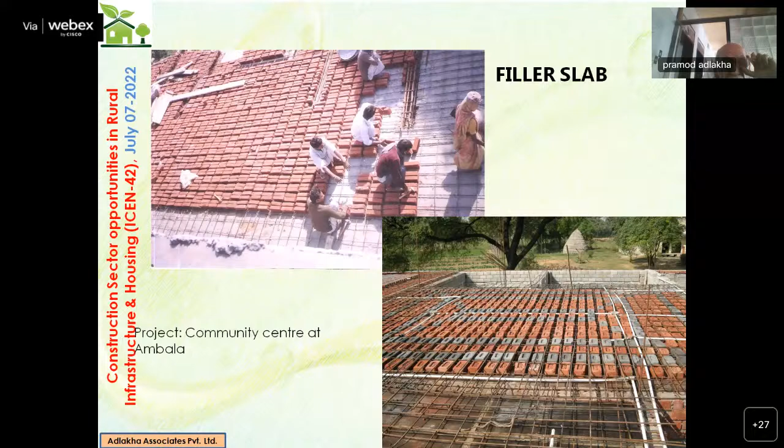We designed and got constructed, when this railway line was being laid from Jammu to Katra, various site offices along the route, using a precast panel system with precast columns and precast panel walls.

This is again Greater Noida Authority - vernacular technology is used for different parts of the building. A building has many parts, so each part has its own technology.

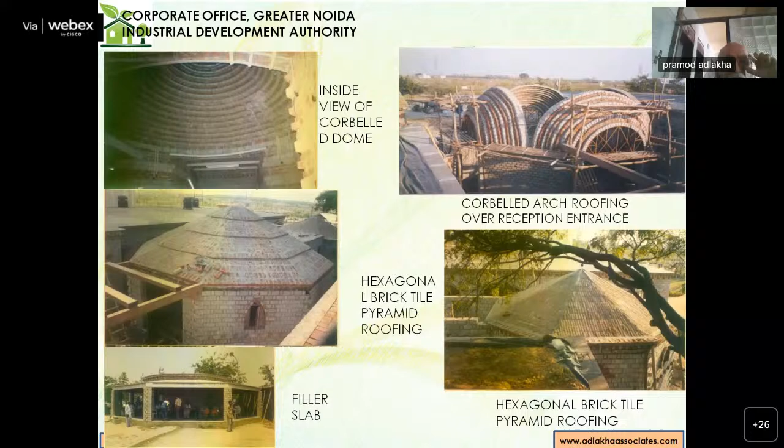Yes, again Greater Noida Industrial Development Authority.

These are other buildings. The first one is the Community Hall Ambala. In this, I have used 34 different technologies for walls and roofing. Each room, each wall has a different technology, each roof is a different technology. It's a showcase, constructed under BMTPC.

Lots of students and faculty were trained on this. Students from engineering colleges used to go there to see it even during construction. The most important part is that training has to be given on the ground. Theoretical training is easier through video conference or teaching in labs or on podiums, but giving them training on the ground is the more important part, which is what I concentrate on.

Like this, I have trained almost hundreds of engineers, hundreds of supervisors, masons, and as I said, students and faculty members. Even in engineering and architecture colleges, I have had mock-ups made of this technology so that students can understand it - that becomes their park, a technical park for them.

This is Modi Bhavan in Mathura, right side is Greater Noida 20. This is a shopping complex, residential complex in Modi Nagar. This is a multi-storied building in Ashok Vihar, Delhi, based on precast panels and precast joists.

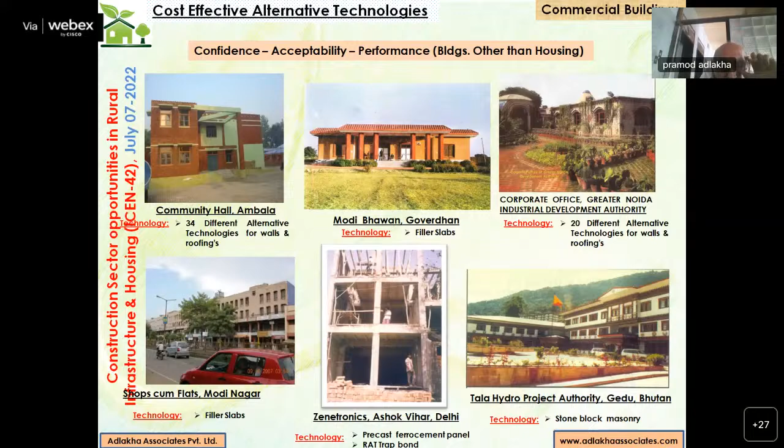Right side is the Tala Hydro Project Authority, Gedu, Bhutan. We have used stone block masonry in this - the first time we tried it and introduced this technology in Bhutan, in this project.

The left side is the Ballabgarh Animal Welfare Board of India office. It's on the main road, which has used interlocking blocks, load-bearing walls, a lot of ferro cement, different roofing technologies, and a lot of precast roofing systems. Again, there are various parts of the building, and each has its own technology.

The middle one is the Gini Devi Modi Hospital, Modi Nagar, which used a filler slab. The right one is a hospital building in Ludhiana. Left down is a hospital again in Lucknow.

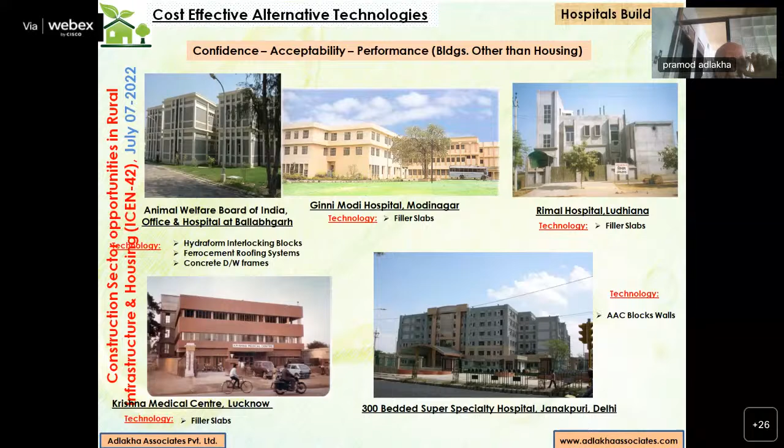Then it's a hospital in Delhi itself, where we used this AAC block for the first time in the PWD, Government of Delhi - this is the first super specialty project of the Government of Delhi. The left two side slides are of Moscow.

This is where I learnt also. In fact, this is not my technology, it's a composite use of steel and concrete structure. I learned it there, but used it after learning, in building a hotel at Moscow. I only got the slides during construction. I didn't go after completion because the project was abandoned once the USSR broke up.

Then on the right side is the hotel Samrat Charbagh. Below is the Lucknow Kohinoor Hotel. Precast technologies are used in this multi-storied hotel also.

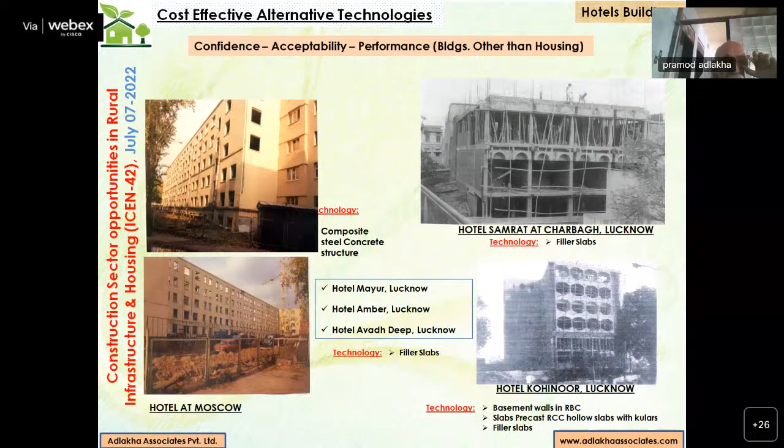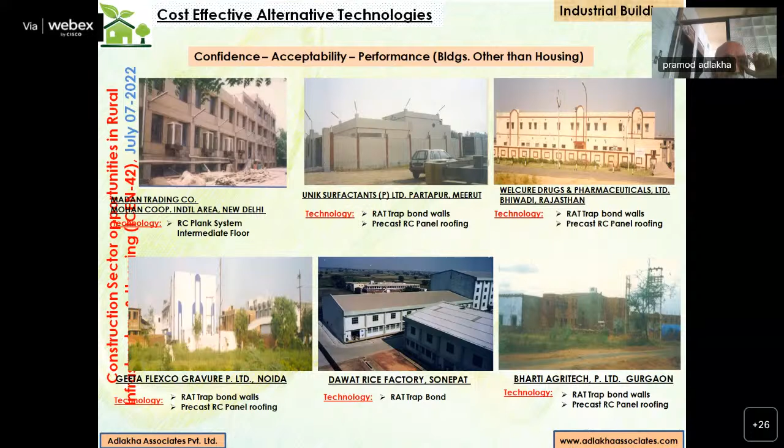Now these are some of the industrial buildings I have done using rat trap bond, precast elements, precast roofing, RC plank, plain ferro cement roofing system with precast joists. This is all around Delhi and NCR. Again, some other industrial buildings.

We have taken PAC of a system of building. This is not an individual technology, it's a system of building through BMTPC. The system is integration of different technologies. We call this an integrated hybrid system. I have developed 4 hybrid systems. For one, I have taken the PACs; for others, I have yet to take the PACs.

This is something I want to convey, and something CBRI should feel proud of. The government of Ghana has awarded the contract for construction of 30,144 affordable housing units to a French company, for which we are the consultants, partnering jointly with the government. The accepted technologies are RC planks and joists, interlocking block walls, mortarless block walls, load-bearing constructions, and many other precast systems. Preliminary concept designs and technologies have been approved by the government of Ghana.